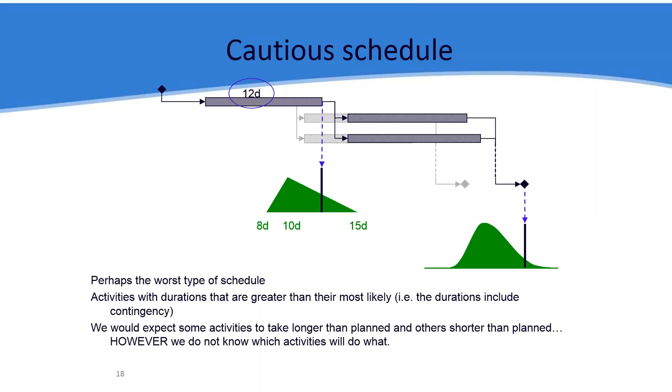This is also related to risk, because today we are especially going to speak about uncertainty. Uncertainty is one of the biggest impacts on the project schedule. When people have uncertainty, they can approach it pessimistically or optimistically in their estimation, and that's why estimation is important. We're speaking not only about estimation of cost, but estimation of time, estimation of effort, and estimation of the start and end, so it's very important to integrate estimation with our project schedule.

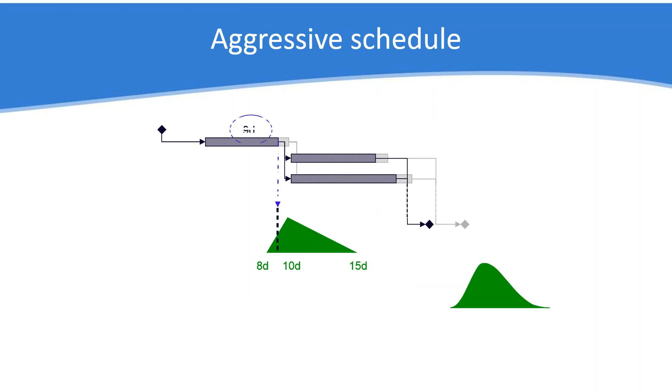This is a slide I like to share, because everybody before starting a project has a different imagination of their project. But unfortunately, in more than 18 years of working implementing project management systems, I've never seen any project without any problem. So that always after project start, we can find out a lot of challenges, obstacles, and issues, and this is what we need to deal with. That's why if we estimate better at the beginning, we will prepare ourselves much better.

We mention that we have 2,000 plus customers. The reason is not marketing. The reason is to show how experienced we are, and considering implementing for 2,000 customers means we gain a lot of case studies and a lot of understanding about project management requirements.

And we work also with different solutions in different markets, in different locations. This also gives us a very big understanding of the cultural project and location-based requirements, because each territory, each country, people have different types of management, different types of understanding, and completely different approaches. Even working hours, working times, and the description of risk are completely different. So that's why we're very proud, but at the same time happy to share with you the number of customers with their know-how.

Today I selected Asta Powerproject, with the aim of showing you how we can integrate risk when using Primavera and Microsoft Project with Asta risk management, because Asta has an easy to use and excellent approach for risk management, which can be easily implemented after a few days of going through and setting up the basic configuration.

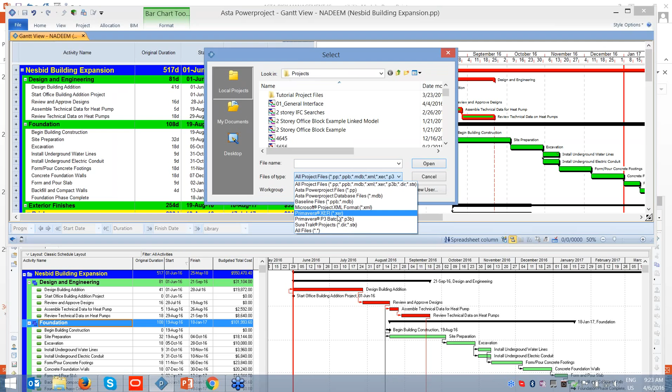In many cases we also find political scheduling. In my opinion, this is when people use planning software just for reporting historical data, preferring to do the job and apply the plan according to reality. In many cases people are using just a political approach.

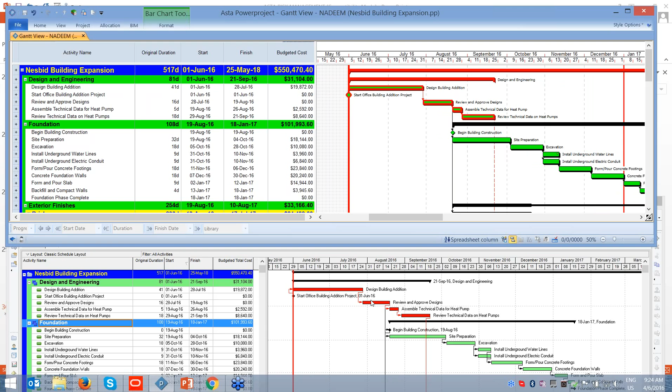But let's look at what pessimistic planning and the pessimistic approach mean. I give this example in my conferences and seminars. Let's say I'm a simple civil engineer working on site, and our planning manager visits my room and asks me about a task.

Let's say he asks me to prepare some specification, and my first estimation is 10 days. But I never report 10 days to my planning engineer, because if I tell him 10 days and don't finish in 10 days, I'll be in trouble. So what I do generally is say, let's put 2 days more as a buffer.

This is my risk, because if something happens during these 10 days and I delay 2 days, I'll still be safe. That's why I commit to 12 days.

And what my planner does is visit our project manager or boss, using the same assumption: let's be safe. He adds 3 more days and tells our boss we can do this job in 15 days.

We're speaking about one task. When I receive the task with 15 days allotted, my approach isn't to start today and finish as early as possible.

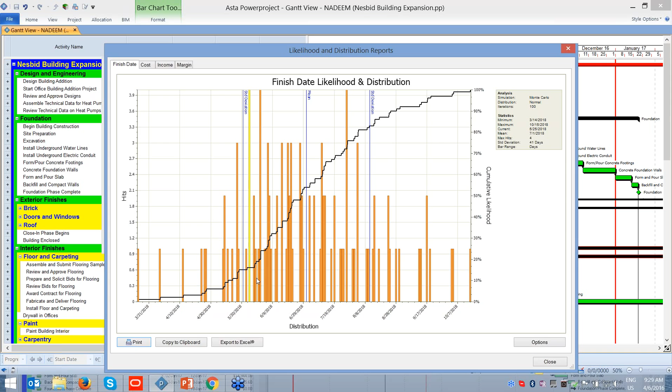Generally my approach is: 2 days I'm on Facebook, 3 days I'm on Twitter, not very motivated to concentrate on my work. I start as late as possible, because I believe this is 10 days of work, and if I have 10 days spared, I'll be able to finish it.

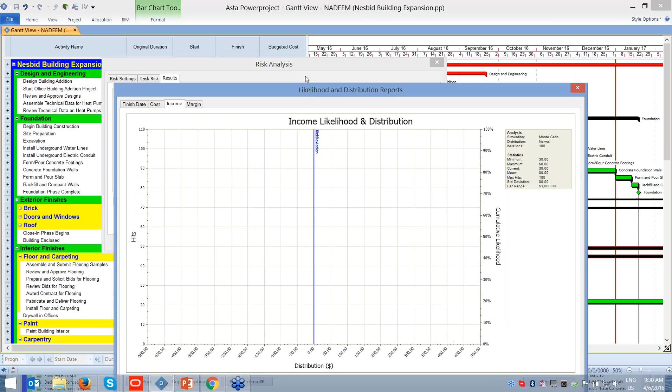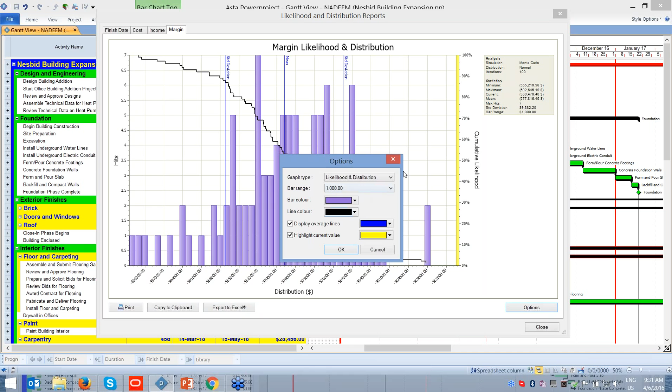But what happens—maybe I was right, maybe my planner or boss was right, or someone in the team didn't assume enough. There's a risk: material delay, design changes, and some issues that slow down my performance. Unfortunately, I spend 80% of the time but still haven't delivered 50% of the remaining work.

This is how it works in real life, in construction. That's why at the beginning of a project we're all in a 'don't worry, we will manage' mood, but at the end of the project we have panic and a crazy working period, spending more time in the office and working very hard to finish on time.

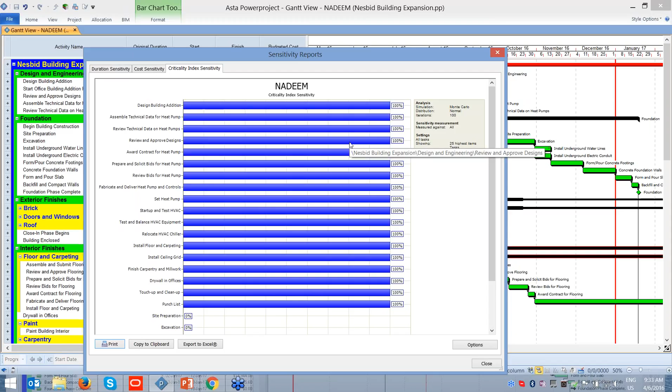What is the advantage and disadvantage of this? Because we are speaking not only about one activity, but multiple activities, when one activity delays, it will also cause other activities to delay. With all the people in my company and project having the similar approach, we make unnecessary huge buffers in our projects, causing an extremely pessimistic approach, where we always use this buffer because of less efficiency. This is one of the worst case and one of the worst scheduling types in my opinion.

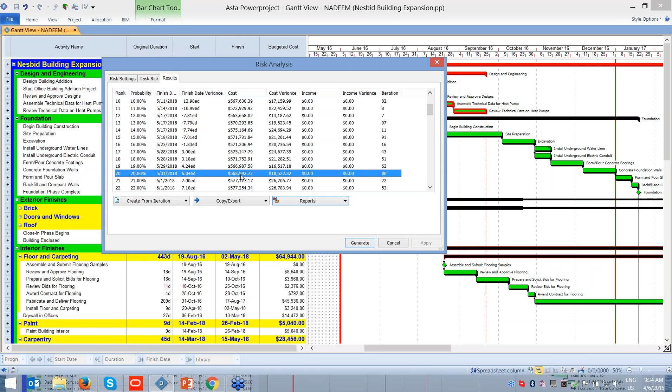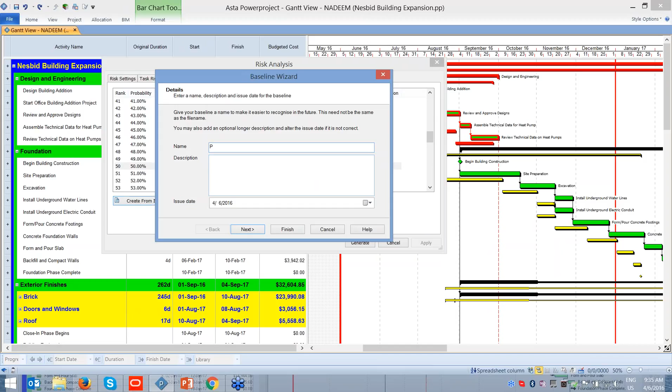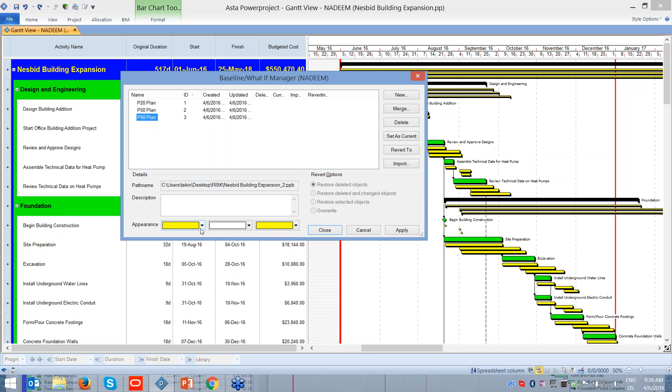The opposite one is the optimistic planning approach, a totally different way. Let's say my estimation is 10 days, but we have some pressure from customer or management, and my planner says, well, he will delay anyway, better to tell him 9 days, and he will be delayed 1 day more. We use this method very often for pushing people, and then the boss says, do it in 7 days, because this is how we aggressively and optimistically estimate it. Of course, when I receive the job for 7 days and work on it, there is an advantage and disadvantage, because it can work once until the moment I deliver my task late in 10 days and management has tolerance for that, but it will never work again.

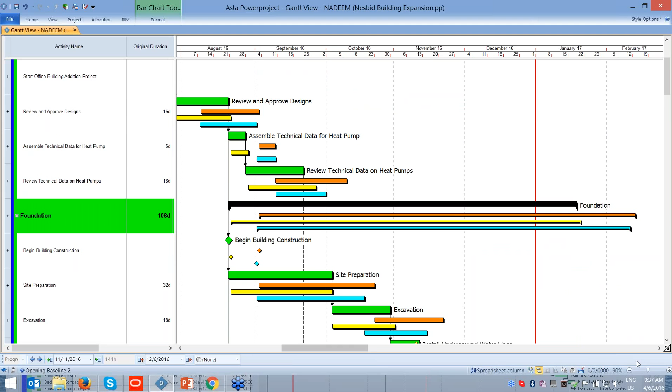This may be better from a motivation perspective, but it can also demotivate people, because if people don't believe they can do it in 7 days, it will never work. This is also how it impacts the schedule, for less than estimated duration, and this is the aggressive schedule impact.

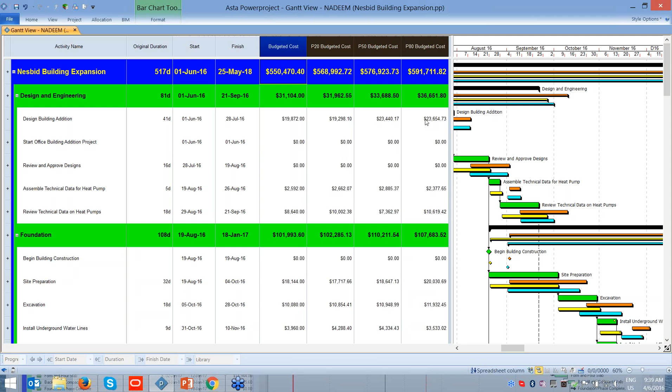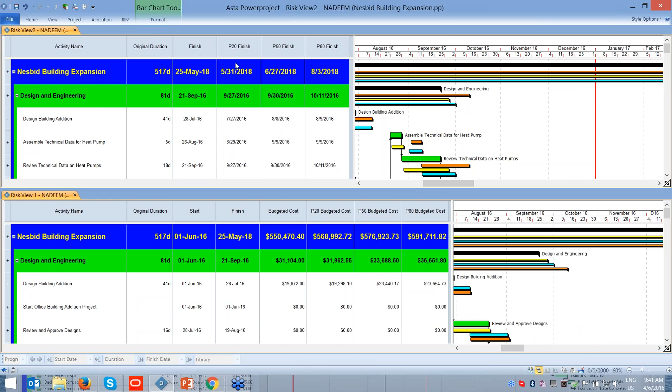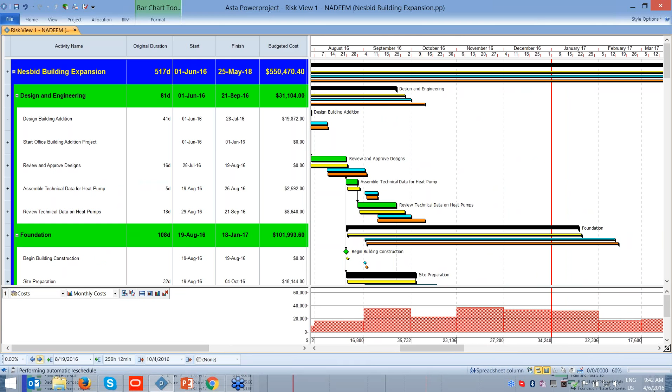A solution for this that we generally implement and recommend is Monte Carlo simulation. Today we are not going to speak about the critical chain method, but Monte Carlo simulation integrated with critical chain. We will be running another seminar for critical chain management and will send you information about that for some other day. But today I just want to speak about Monte Carlo simulation, and I prepared some demo from Primavera. We will also make some simulation, as Powerproject also has possibilities for Monte Carlo simulation.

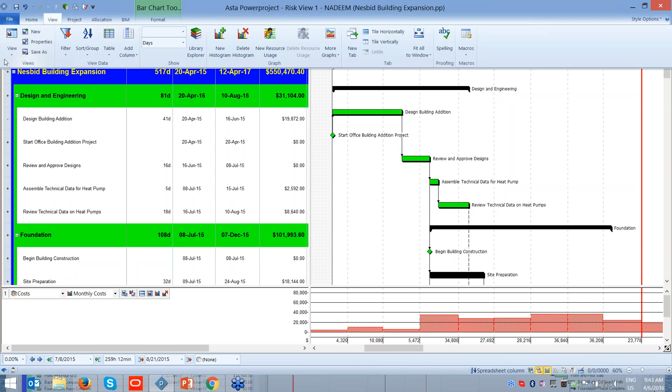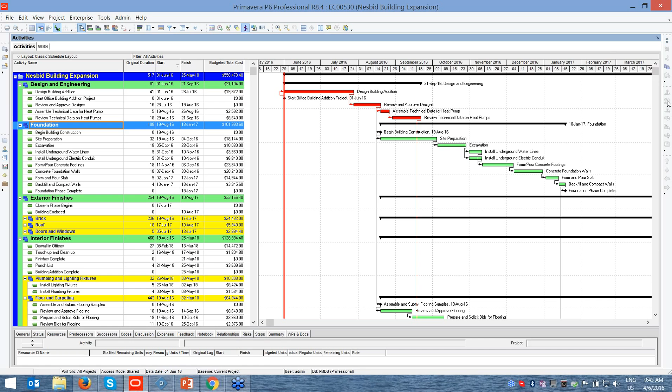What is Monte Carlo simulation? First of all, the name actually comes from gambling. Monte Carlo is a city in Monaco, and near France, in some area, people are gambling. The idea is that we have some iterations, and we randomly select, let's say, 10 days activities from some box, making the iteration. First one is 10, second one is 9, third one is 14, and fourth one is 17. So I just randomly select 10 times, or 11 times, or 100 times, or 10,000 times, some random envelope, and by this way it gives me some statistics, which we call the estimation or the risk.

When I do the real example, it will be more clear: the activity, when I do it the first time, is 10 days. When I do it the second time, it is 17 days.

When I do the activity a third time, it will be 8 days. So I collected 10 iterations, and this gives me some estimation. Of course, 10 times is not the optimum.

Generally we need to do 5,000 to 10,000 times to get closer to reality. In a moment we will run some simulation, but first let's look at the implementation in P6 and Microsoft Project.

First, we created the schedule in Primavera or Microsoft Project, since today's session is about Primavera and Microsoft users, so you can create your schedule there. Later, since Asta Powerproject has 100% integration with Primavera and Microsoft, we can open the Primavera or Microsoft Project file directly in Asta Powerproject.